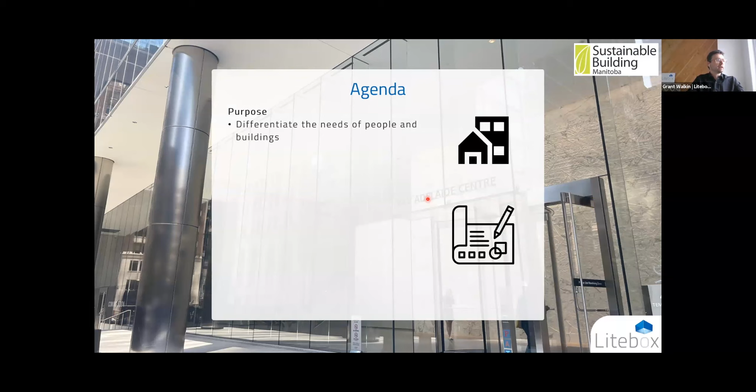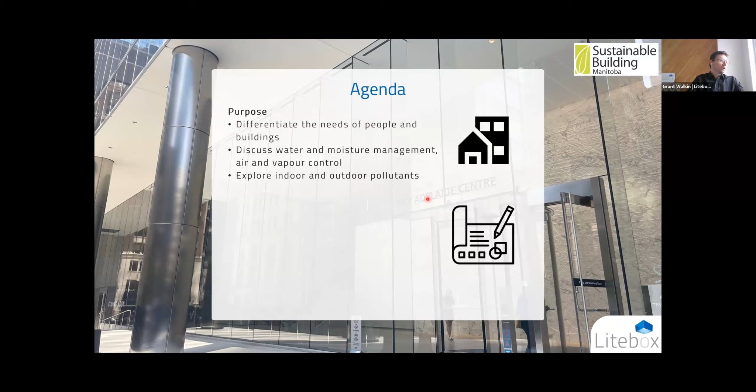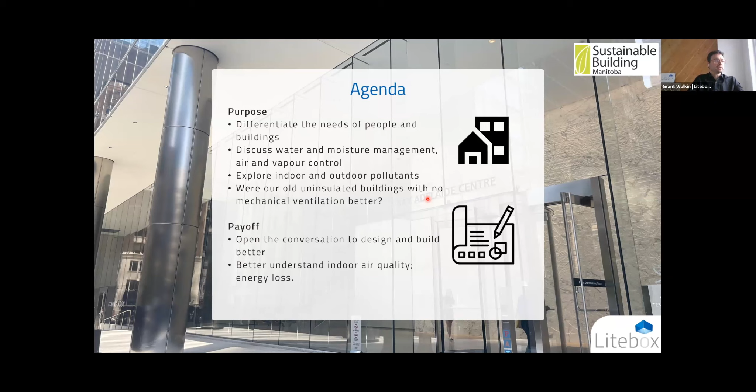Quickly going through the outline, the purpose of this presentation is to differentiate the needs of that topic based on both looking at it from the occupant perspective and the building itself. When we look at the building, we're thinking more on the moisture management, the water, air and vapor control of the building walls. We'll explore the indoor and outdoor pollutants that affect the occupants, and review whether the older, uninsulated buildings were any better because they breathed—were they better for everyone and for the building? Hopefully at the end we have an open conversation to design and build better, and better understand indoor air quality and energy loss through the building envelope.

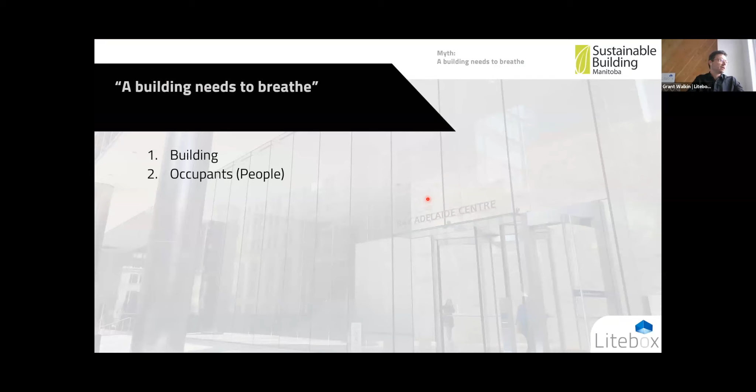Okay, so building needs to breathe—two parts of it. I'm going to break it up into the building side of things, the building envelope, the health of the building itself, and then the occupants, the health of the people that use the buildings. So looking at it from the building side, do buildings need to breathe? Why do people say that?

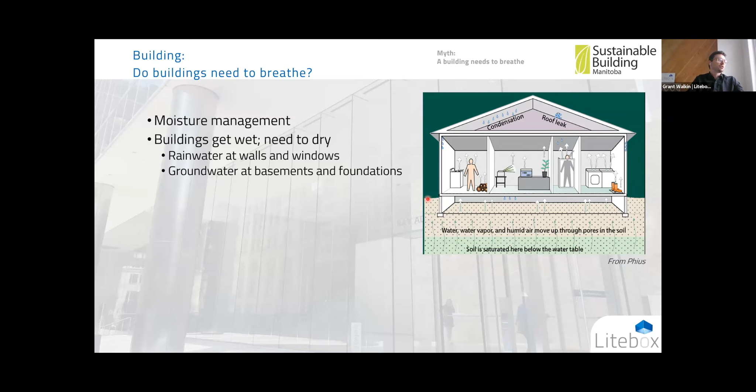I think the biggest reason is the thought of moisture management. Buildings get wet, building materials get wet through seasons, rain events, groundwater. They need to dry—it's okay for most building materials to get wet as long as they readily can dry. We also have interior moisture sources from people: their breathing, showering, cooking, their activities, drying your clothes, and plants as well.

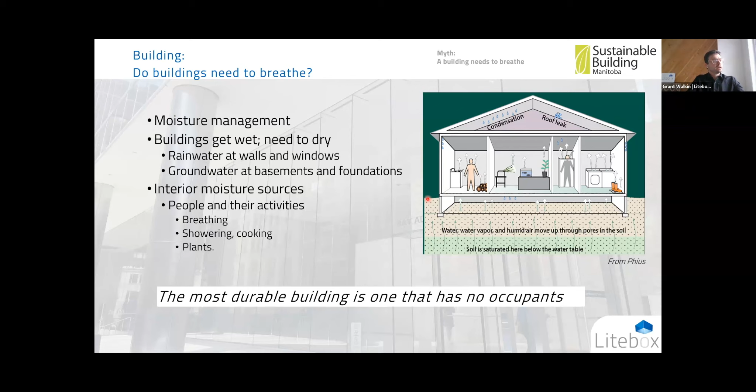I've heard this saying before—the most durable building is actually one that has no occupants, because occupants provide a lot of moisture load to buildings. This is true as long as that building is actually still heated, even though no one's in it. If it's not heated, there could be issues because you don't have that waste heat to dry out the walls.

If we look at it from the perspective of the four principal control layers of a building assembly—water, air, vapor, and thermal—water is more important than air, air is more important than vapor, and vapor is more important than thermal. So it's in that order of importance.

Water is rainwater, groundwater—that is the most important. It destroys buildings and results in mold. The least important, thermal—the insulation of a building assembly—is the one that codes have the most to say about. When we talk about high performance buildings, R-value is referred to as an important metric. What's your R-value of your wall assemblies? Oh, okay, it's high, so it must be a good building—but not necessarily, because that's the lowest ranked in importance.

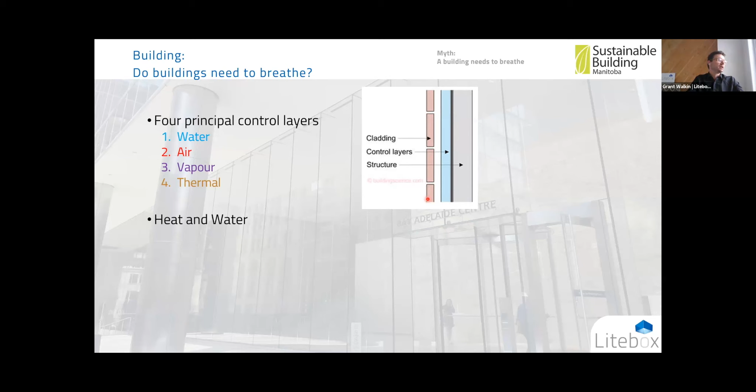All these four principal control layers have one thing in common: heat and water, specifically latent heat, which is when heat is released or absorbed in the change of phase between a solid, liquid, and gas. Vapor is water that has evaporated, so it's water vapor—water still in that form. For water to evaporate, heat needs to be added to the system, and heat flow is prevented through thermal insulation in the walls. Air itself carries a lot of moisture—more than vapor diffusion through a building assembly. All energy is heat or on its way to becoming heat.

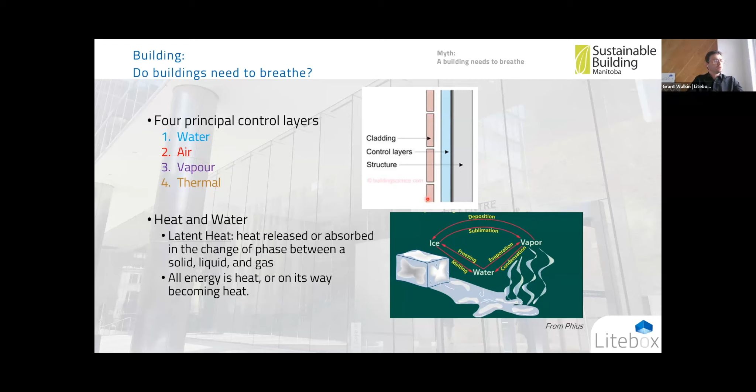So we look at these four principal control layers—we'll look at water and thermal here. Water: buildings need to dry. Buildings naturally get wet when it rains. Water can get in—we protect against water penetrating the building, but it can still come in through construction defects, failed sealants, deteriorated materials, etc. It naturally comes into a building, and it needs to dry. So we need latent heat for that to happen, for that energy change from liquid water to water vapor.

It happens from the inside, using energy that comes from waste heat. When you're heating a building, there's energy flow from the inside through your walls, and that helps dissipate moisture and dry that assembly.

Add more insulation and that reduces it. From the outside, we have a good energy source: the sun. Rain screens are really important to aid drying, both from the outside and from the inside. Moisture flows from the inside through the assembly.

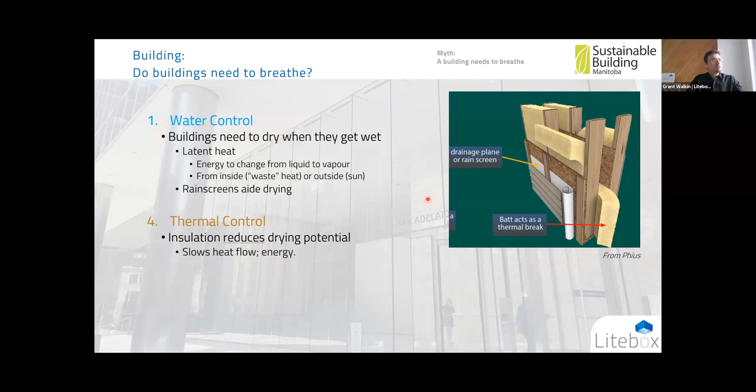If it can adequately move through and not condense, then it can also dry. Thermal control reduces that drying potential because it slows the heat flow, which slows energy. So the more we insulate buildings, the less waste heat and latent heat can get to the building assembly and dry. With that in mind, for the people that say buildings need to breathe in order for the building to last a long time, it could be said then that buildings need to be uninsulated.

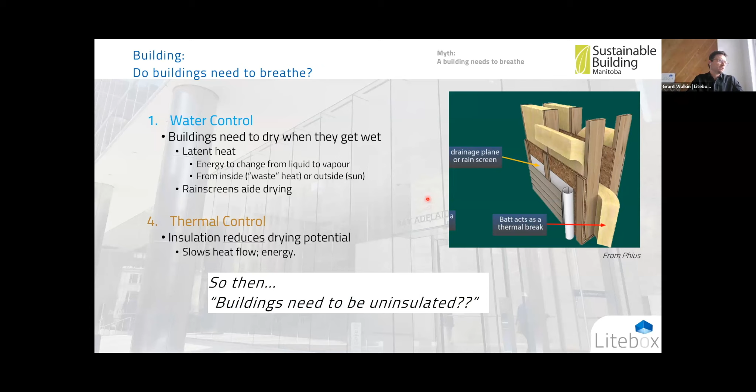Which is unpractical from a comfort perspective of the occupants. And that's the primary importance of a building: shelter, protection, and comfort.

Looking at vapor control, climate-specific vapor profiles are very important. Depending on your climate and location, we want to protect against moisture moving through your building and condensing in the wintertime, because the warm, humid air on the inside of a building will move through that wall assembly and condense.

So you want to prevent against that using vapor retarders, but ones that are appropriate for your climate and application. A swimming pool requires a different type of vapor barrier or vapor retarder than, say, a single family house. Our code mandates for Part 9 single family houses no greater than 1 perm, which is considered a Class 2 vapor retarder.

Vapor retarders prevent wetting and interstitial condensation, which is great. But they also prevent drying in both directions. So we want to promote drying in the correct direction, and that's only true for one of the seasons.

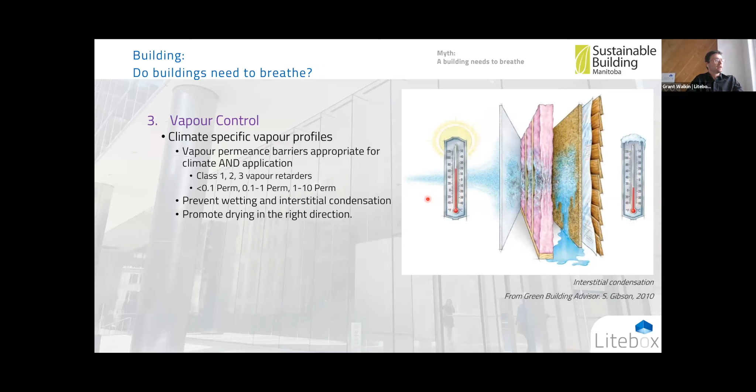So we pretty much guard against it at wintertime, when we have our vapor barrier on the warm side of the wall. But then in the summertime, our vapor retarder or vapor barrier is actually on the incorrect side, because it's hot outside and, in an air conditioned building, cool inside. So it's a little bit reversed. We want to guard against that and provide vapor barriers correct for the climate and use of the building, to maximize drying of the assembly, because vapor barriers prevent drying in the direction of the vapor barrier.

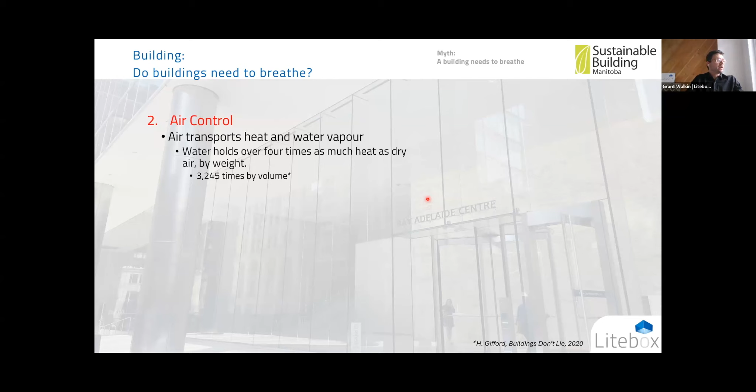And the last one is air control. Air transports heat and water vapor, and water holds a lot more energy and a lot more heat than air—4 times as much by weight and 1,000 to 3,000 times by volume. So there's far more moisture moved through air movement than vapor diffusion. That's why air control is much more important than vapor control on that hierarchy list.

Here's an example in this figure. A sheet of drywall: the top shows vapor diffusion movement pushing through a third of a quart of water, and the bottom is the same area, but instead of vapor diffusion, there's a 1-inch hole with a pressure differential of 5 Pascal, which is a regular amount of pressure difference you could expect to see. That 1-inch hole could be the free area of an electrical receptacle. You can see 30 quarts compared to a third of a quart—100 times greater moisture movement through air leakage than through vapor diffusion.

In summertime we have high relative humidity, and in wintertime we have low relative humidity. So if we don't protect against air movement and provide good continuous air control, we will have a lot of moist air coming into the building in summer and a lot of dry air exchange in winter. We want to guard against that for occupant comfort and also building durability.

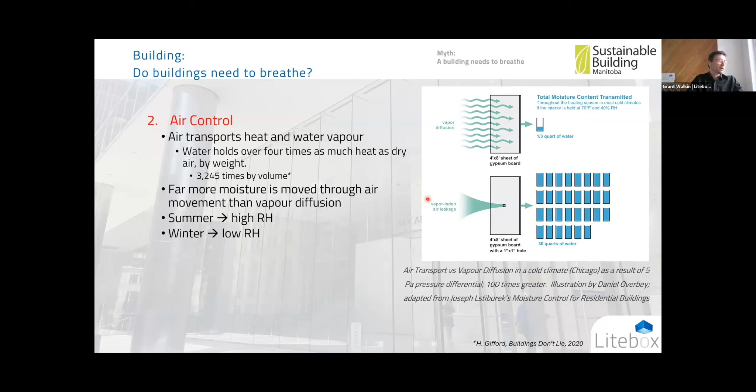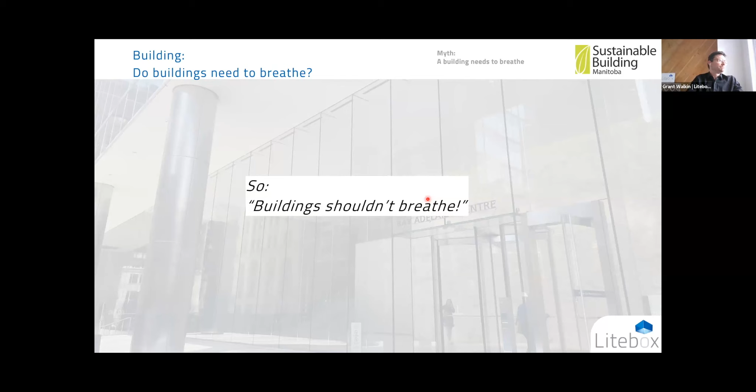So with that in mind, from the perspective of buildings, they shouldn't breathe. Buildings should be airtight and vapor permeable in the right direction with the right membranes.

Now for the occupant part of the statement, buildings need to breathe. We as occupants need good air quality. We need to not have pollutants in the air. What types of pollutants do we have? We have CO2, carbon dioxide. It's a really good metric of people's exhaust air, and it's directly related to occupants.

An 11 by 13 size office room had atmospheric carbon dioxide increase from 500 parts per million to 1,000 within 45 minutes of ventilation cessation and closure of windows and doors. That causes and affects cognitive ability.

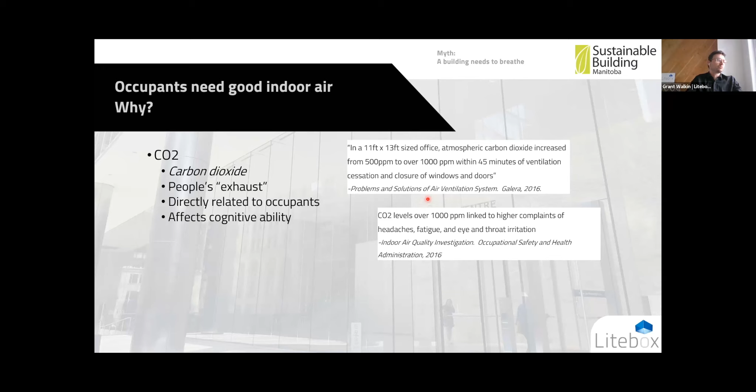CO2 levels over 1,000 parts per million were found in a study to be linked to higher complaints of headaches, fatigue, and eye and throat irritation. Another study showed that poor or no ventilation in a bedroom with closed doors routinely exceeded 2,500 parts per million, and that sleep and next day performance can be significantly improved by increasing the clean outdoor air supply rate in the bedrooms.

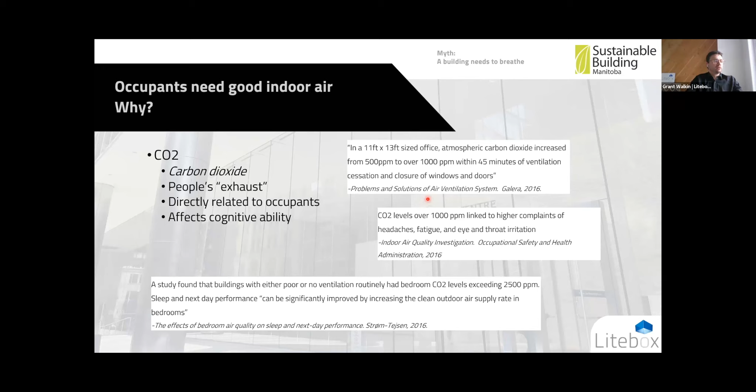So it's incredibly important. Carbon monoxide, CO, is caused by incomplete combustion. It's odorless and can cause death. The sources are combustion appliances, so gas furnaces, gas water heaters, fireplaces, etc. All electric buildings that also don't have a fireplace are unaffected by carbon monoxide, which is one of the reasons why going all electric can be healthy for indoor air and affect the occupants positively.

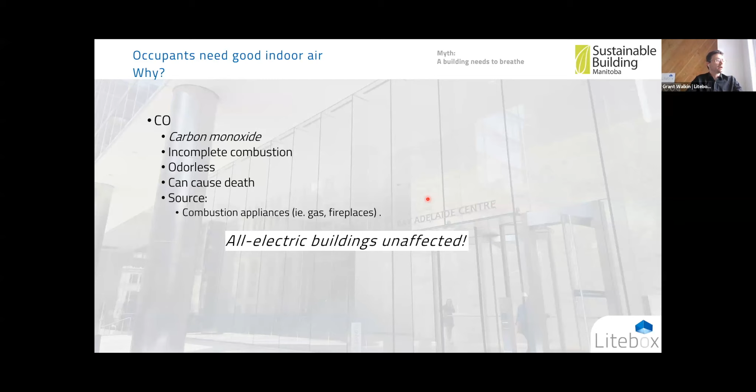Another one is volatile organic compounds, so that new car smell, scented candles have it, perfumes. Those aren't necessarily good, healthy smells for you. They might smell good, but more than likely they are not good.

VOCs also include formaldehydes and other known cancer-causing toxins, caused by off-gassing building materials. A lot of engineered wood products have formaldehydes in the glues. Insulation products are manufactured with binders containing formaldehydes. A lot of them claim the formaldehydes are pretty much off-gassed after production, but it's still there as part of it, and remnants still might be within that material.

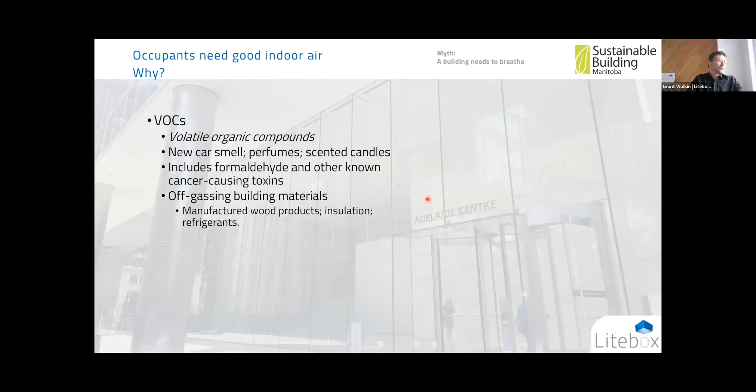And another one is refrigerants. Radon is really important for indoor air quality. It's an isotope, released from soil and rock, it comes from the ground. It's the number one cause of lung cancer in non-smokers, and the number two cause in smokers.

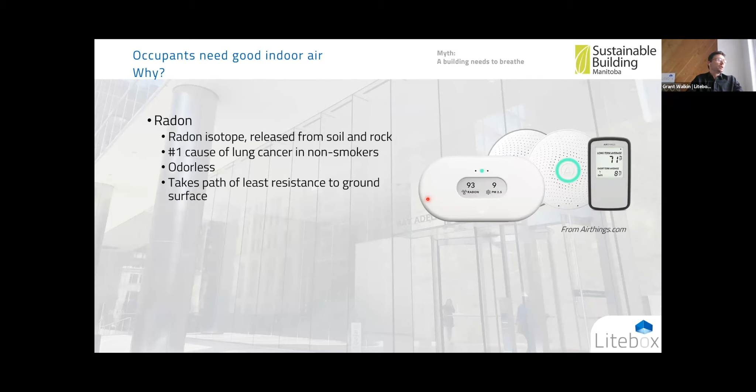It's odorless. It takes the path of least resistance to the ground surface. So leaky basements, air leaky basements, are an easy path for radon to enter your building. Radon levels are typically highest in wintertime because ground cover provides a barrier, and the path of least resistance is typically through building basements. The same goes for days of high rainfall, which blankets the ground and provides an impermeable layer where radon levels can increase.

So it's important to monitor or measure radon levels in buildings, and if they are high, to provide mitigation against them.

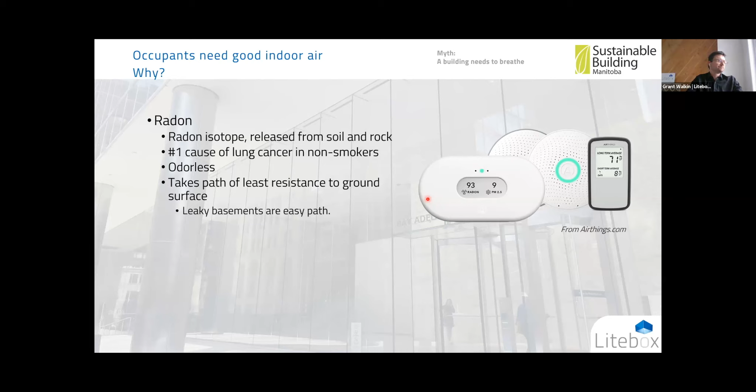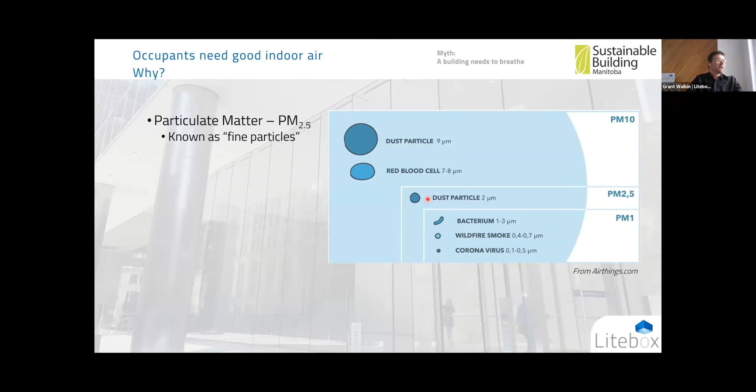Particulate matter, commonly referred to as PM 2.5. There's also PM 10 and PM 1. 2.5 is the most common, known as fine particles, very small, smaller than human hair, and small enough to enter your bloodstream. There is no known safe amount of PM 2.5 that would be healthy or acceptable for us to breathe, so we want as little of it as possible.

The sources come from daily routine things like cooking and combustion appliances, outdoor forest fire smoke, etc.

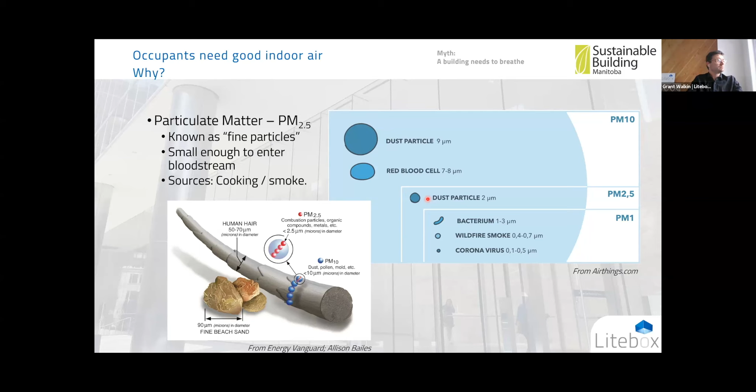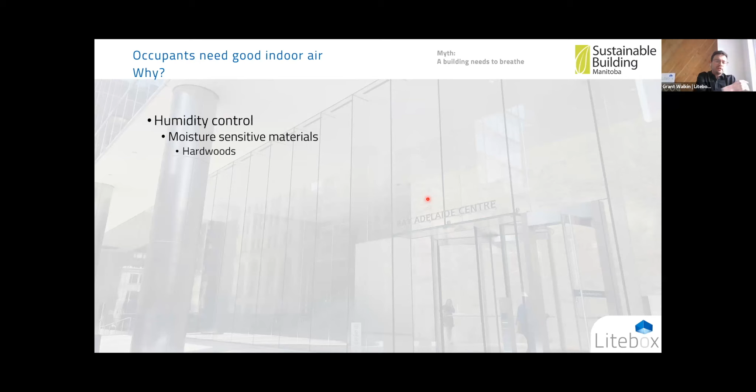Humidity control, this is important. I touched on this about moisture sensitive materials and hardwoods in buildings. You don't want to have low humidity, you don't want to have high humidity. It also affects comfort and health of occupants, so there's a bit of an optimum comfort zone.

ASHRAE recommends for the best performance of the building envelope and occupant indoor air quality, IAQ, approximately 35% in the wintertime. That's based in a climate zone like Chicago, where we're a little bit colder. An RH of 35 for our housing stock wouldn't perform very well. We would have a higher risk of interstitial condensation, which is condensation occurring inside your wall assembly from warm, moist air traveling through and condensing.

So 35% is a little bit high, except for the really high performance homes or buildings that have good air tightness and vapor control.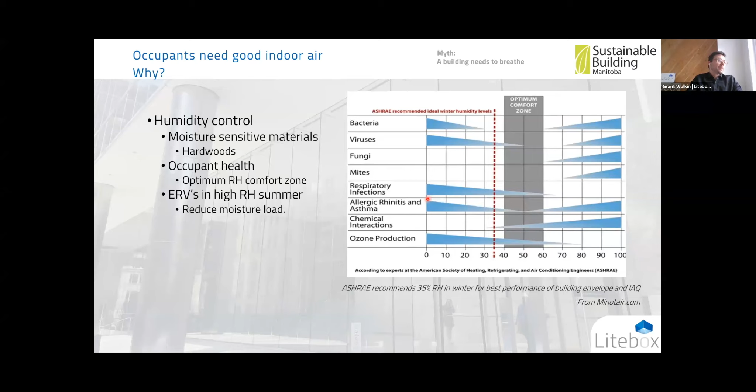So to guard against this, ERVs, energy recovery ventilation systems, provide that fresh air. It also not only recovers heat, but also recovers some moisture, which can reduce the moisture load in summer, and also buffer it in winter so it's not too drastically dry.

Okay, so how do we get good indoor air quality? Fresh air ventilation is the most obvious.

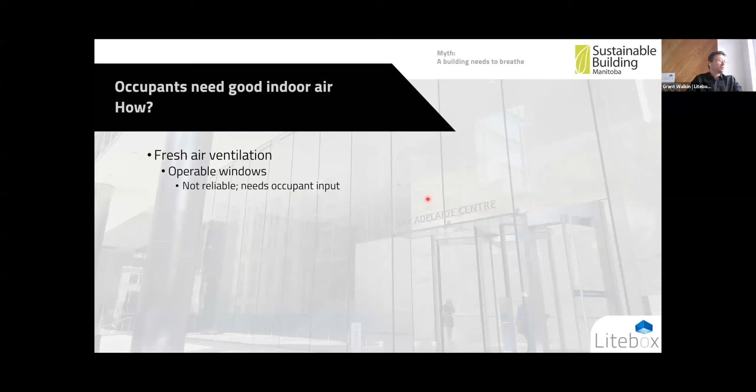Through operable windows is a little bit difficult because they're not reliable and they also need input from people to open and close them. Nighttime cooling can work, but if you forget to close them, it can get hot again in the daytime during summer. It can be an issue, and it's not reliable.

So mechanical ventilation is the best type of system. There are ERVs, which can provide that ventilation system, controlled and balanced, so you have the same amount of incoming air as exhaust air.

It's important to know that outdoor air is not necessarily fresh, so it needs to be filtered. There's pollens, pollutants, smoke, etc. The outside air is dirty, so it needs to be filtered. That's an important aspect compared to operable windows, because operable windows can't be filtered.

So mechanical ventilation wins there too, because you can put a filter with that, and all mechanical ventilation systems routinely come with a filter. The type of filter typically recommended is a MERV 11.

MERV stands for minimum efficiency reporting value. The higher the number, the better. Around MERV 13 is close to HEPA, kind of on the same lines of HEPA. You might hear that reference.

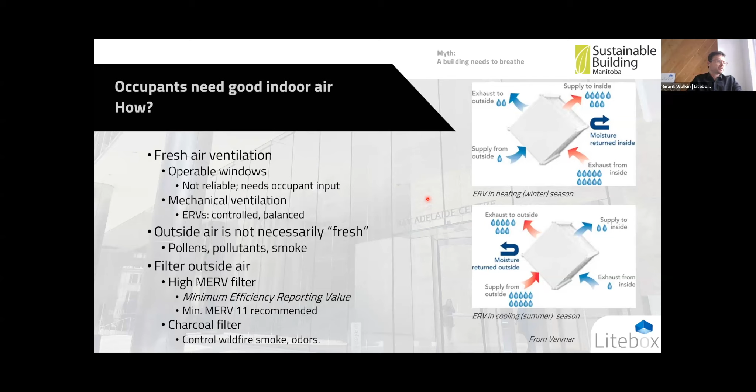And then to control odors and wildfire smoke, charcoal filters can be included with that, and that can help deter against those.

Now to ERVs and HRVs, the importance of them. These are done rather than supply-only or extract-only ventilation systems. The older type of buildings, typically in our climate, in our area in Winnipeg, typically had exhaust-only systems.

That would be your kitchen exhaust coupled with your bathroom exhaust fans, set on timers or whatever. So when you're taking a shower, you turn on your exhaust fan and that turns on. It's actively pulling air out, but that air needs to be replaced, so it's all seeping in at different locations throughout your building.

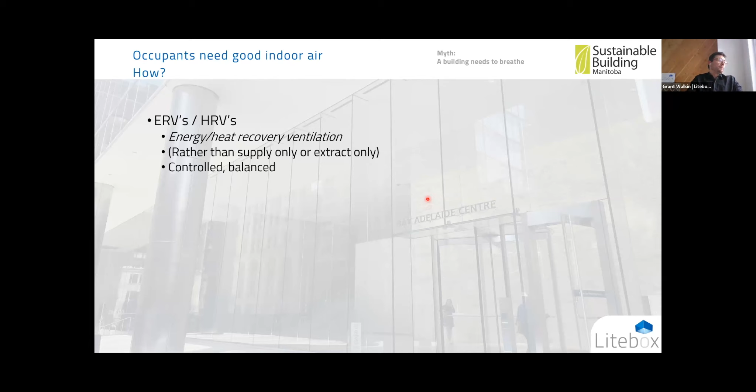ERVs and HRVs are good because they provide controlled, balanced, and filtered ventilation. They also reduce the energy penalty, which can be quite high.

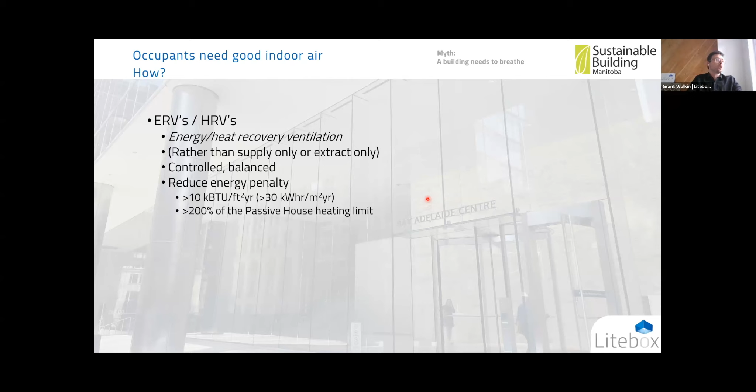In our climate zone, we're looking at about 10,000 BTUs per square foot per year, which equates to an energy penalty of the ventilation alone greater than 200% of the passive house heating limit metric.

It's quite substantial. In terms of dollars, that relates to approximately $600 per year for a typical 2,000 square foot house that's heated electrically at 10 cents a kilowatt hour.

Now, it's important to note that when you're using an ERV or HRV, your ventilation rate is typically greater than if you don't have a controlled and balanced ventilation system. If you're only using extract, the amount of ventilation you're getting is a lot less, but that means your air quality is also reducing. So ERVs and HRVs are worth it.

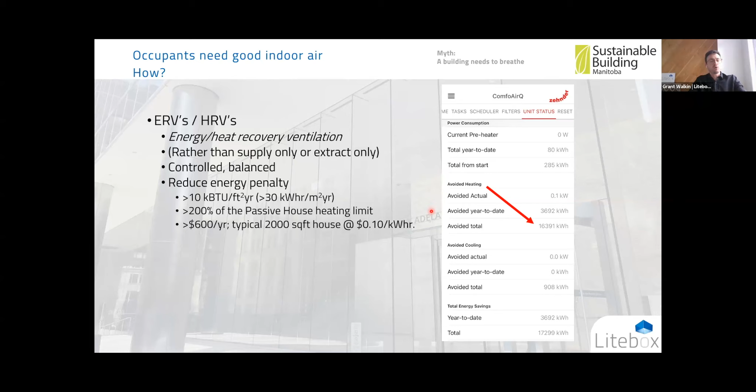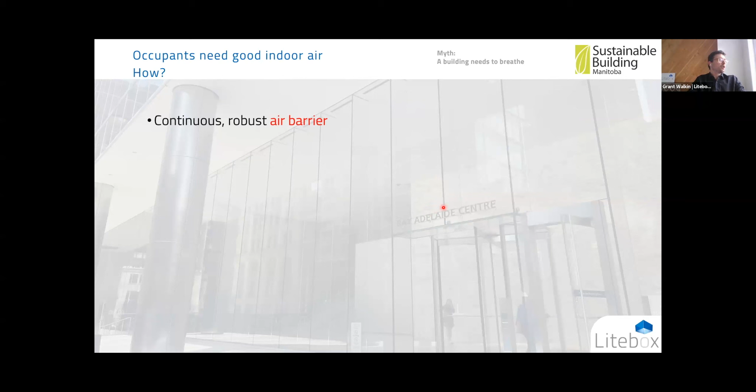How else do we get good indoor air quality? A continuous and robust air barrier is really important, continuous everywhere, all the way from the foundation to the roof and through all penetrations through your walls, windows, doors, etc.

That improves the delivery of filtered fresh air and removing stale air. It averts infiltration of pollen and smoke, especially wildfire smoke, which is becoming a lot more predominant these past summers, and it's forecasted to not get any better. So an improved and continuous air barrier is really important for preventing those pollutants from coming inside.

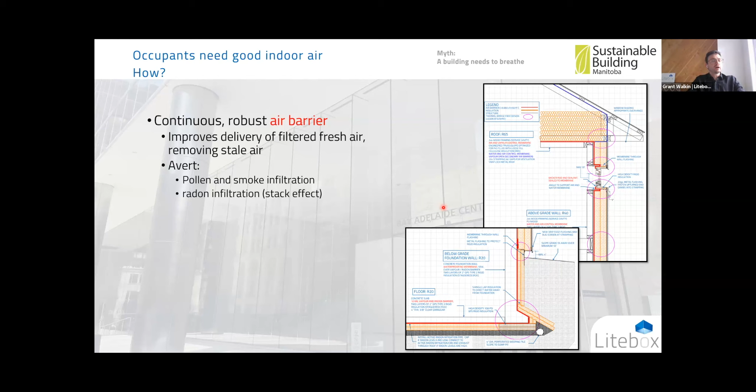From radon that infiltrates through the ground, and as I said before, it takes the path of least resistance. So if you have a very air leaky building, that makes it a very easy target for radon to come in through something called stack effect, the buoyancy of air. This affects comfort, energy efficiency, quietness, and fire resilience.

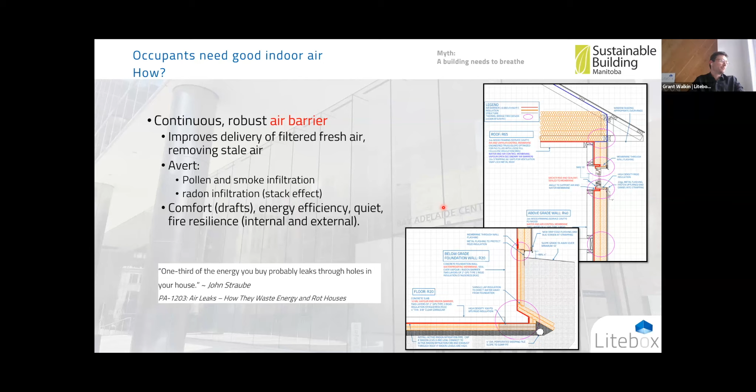John Straube, a building scientist and professor at the University of Waterloo, said in one of his articles that one-third of the energy probably leaks through the holes in your house. We're at a colder climate than where he is, so it's likely more around at least a half, if not more, depending on how efficient your building is. But it's a lot. Air leakage is a lot.

And lastly, source control. So with ventilation systems, supplying fresh air, filtered fresh air, outdoor fresh air to bedrooms and living areas, and extracting through kitchens and bathrooms.

Methodology has kind of changed in the high performance world, from extracting from the kitchen hood or from the kitchen itself and having a recirc hood over your cooktop. Now the methodology is to actually provide direct exhaust for your kitchen exhaust fan. But with a balanced ventilation system, there would still be an extract zone somewhere in your kitchen, just a little bit away from where you're actually cooking, so those greases don't clog your filtration system.

Source control also includes an active radon control system where required when it's tested, and this is important too from building to building. It's not necessarily that if your neighbor has high radon or low radon you'll be the same. Every building is different. Soil conditions are different, and the building shapes and air control barriers are all different.

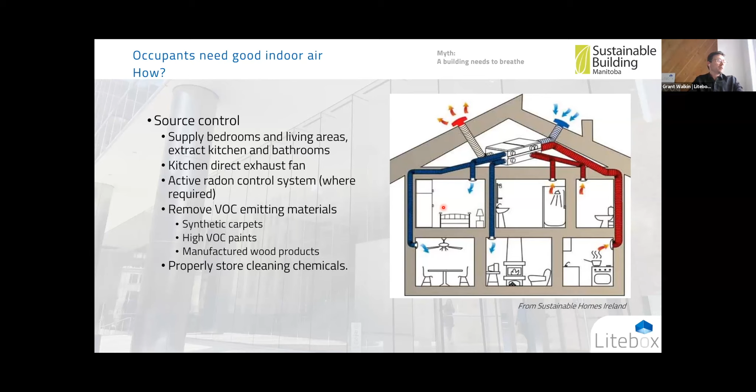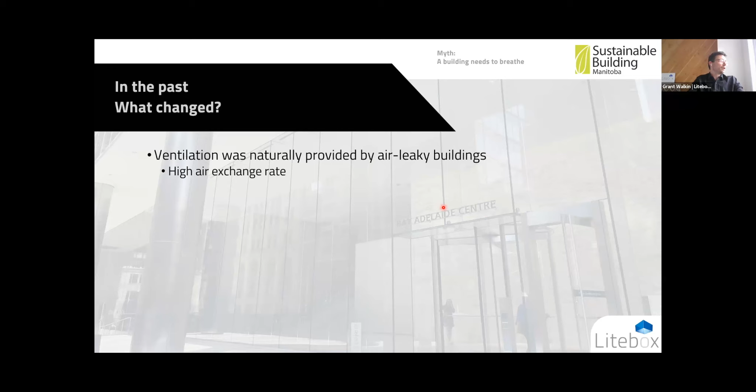Okay, and lastly, so past buildings, what has changed? Were they any better? So ventilation with them was provided naturally, through the air leaky envelopes and operable windows, including the commercial buildings, the office buildings. They had high exchange rate, but energy was cheap, so they just threw more energy at it.

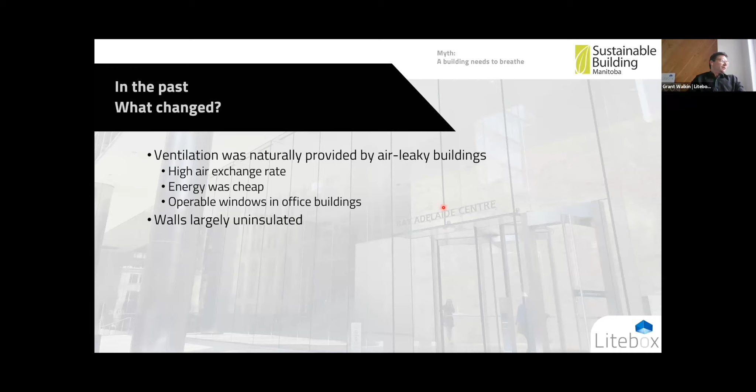Building walls were largely uninsulated. They were either empty or solid cavities, which meant that there was a high latent heat potential, and that was able to readily dry the walls very easily. But obviously not comfortable or energy efficient.

And less toxic building materials were pretty prevalent, including the furnishing. So wood and steel furniture back then was now replaced with the plastic and particle board materials that we now readily see. And so off-gassing of formaldehydes and other VOCs wasn't common. It wasn't really a thing. So older buildings weren't necessarily healthier.

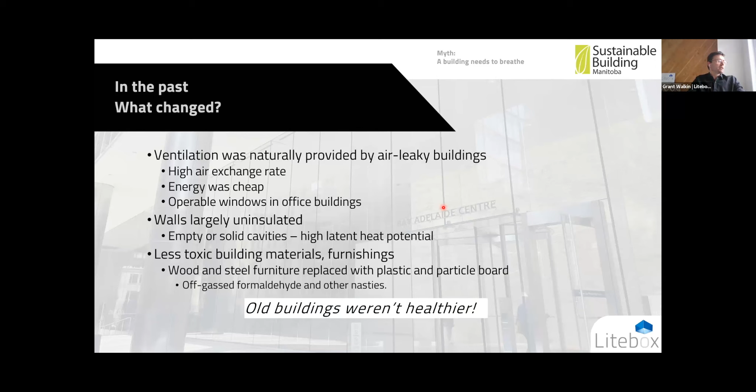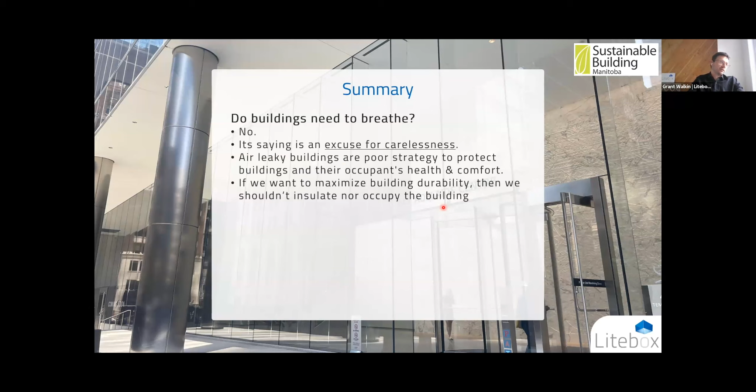So summary, do buildings need to breathe? Short answer is no. Its saying is purely an excuse for carelessness. Air leaky buildings are a poor strategy to protect buildings and their occupants' health and comfort. If we want to maximize durability, then we shouldn't insulate, nor should we occupy the building, which is both unrealistic and pretty dumb.

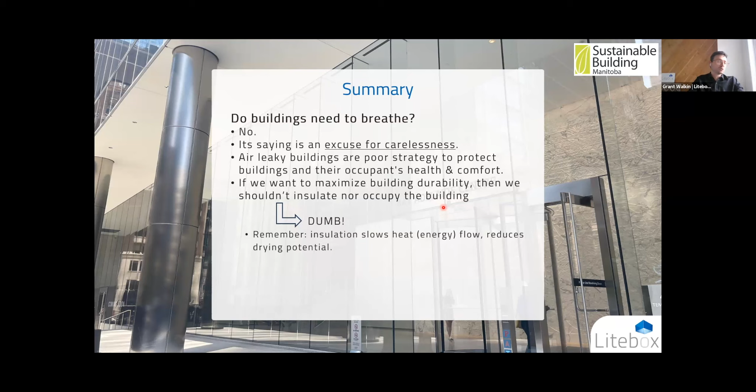And remember that insulation slows heat flow, which reduces the drying potential. So higher performance buildings require higher performance detailing because we need better moisture management. Those buildings need higher moisture management. So the goal: controlled mechanical ventilation with the correct filtration. Using ERVs and HRVs, they save significant energy. Proper distribution and design of fresh air and exhaust. Airtight construction, which includes providing the correct vapor profiles, the correct vapor retarders.

Poly vapor barriers are a complete vapor barrier, and they totally prevent drying in that one direction. So you install that, and you technically only have drying in the outward direction to the outside. So use the highest vapor permeability material acceptable to control vapor for your building assembly.

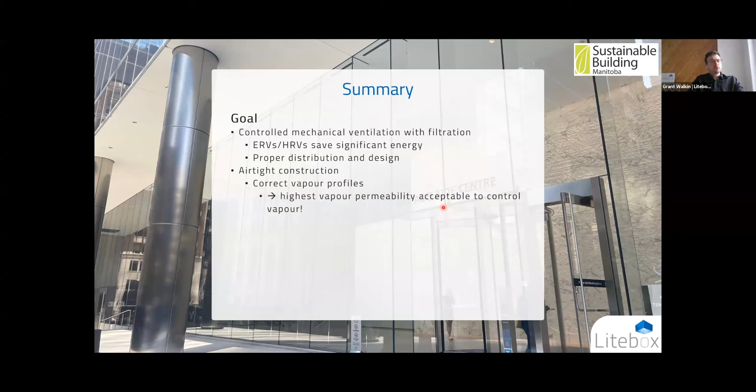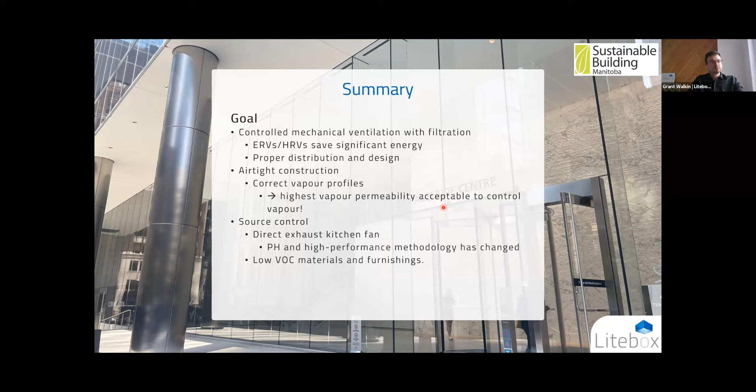And source control, including direct exhaust kitchen fans, and the passive house and high performance methodology has changed in that perspective. And finally, using low VOC materials and furnishings. And that is the conclusion - why buildings don't need to breathe.

Excellent. Well, thank you so much for all of that information you just shared there, Grant. I don't know if you heard, but after all the wildfires that has happened in the past little while, Canada has now the most air polluted cities in North America. How did that information hit you when you heard it, or did you just hear it here for the first time?

Yeah, I've heard that before. I haven't heard that it's the most, but it is pretty shocking, right? Because everyone thought that Canada is this nice northern country with landscapes of green trees and lakes. So yeah, it's not great to hear.